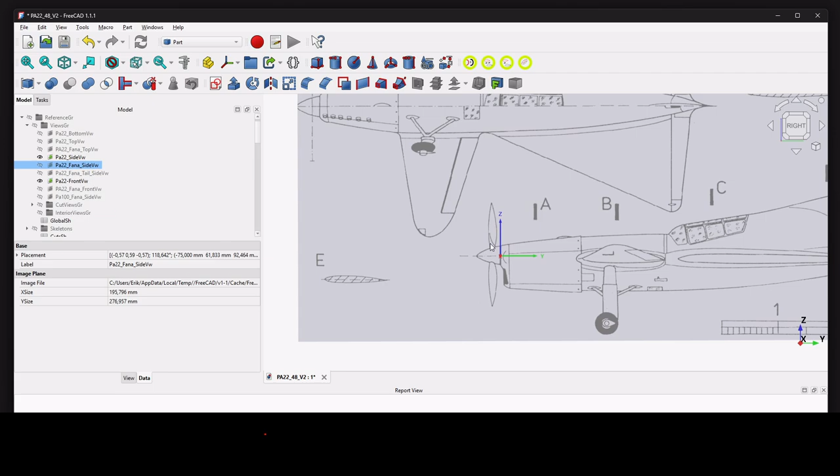So this week we're gonna talk about something a little bit lighter. We are going to focus on the propeller. So the idea is to see if we can follow, I would say, the three views, so the side views and the front views. It turns out that on one of the views, I had both the side view here and also the front view here that you can see here.

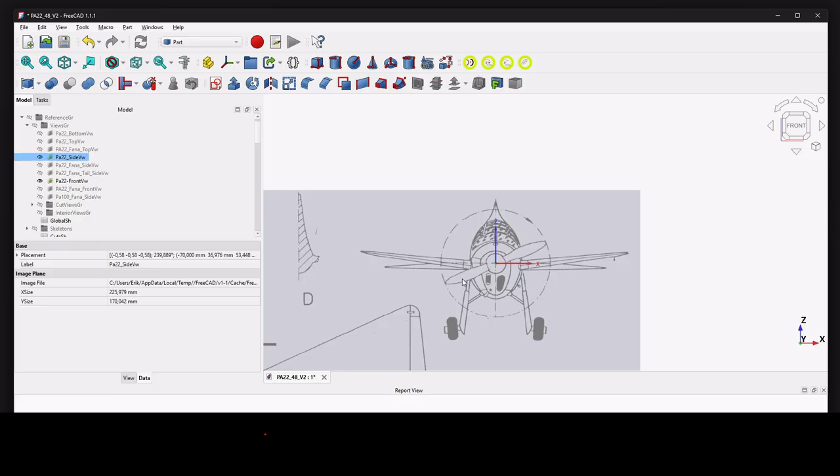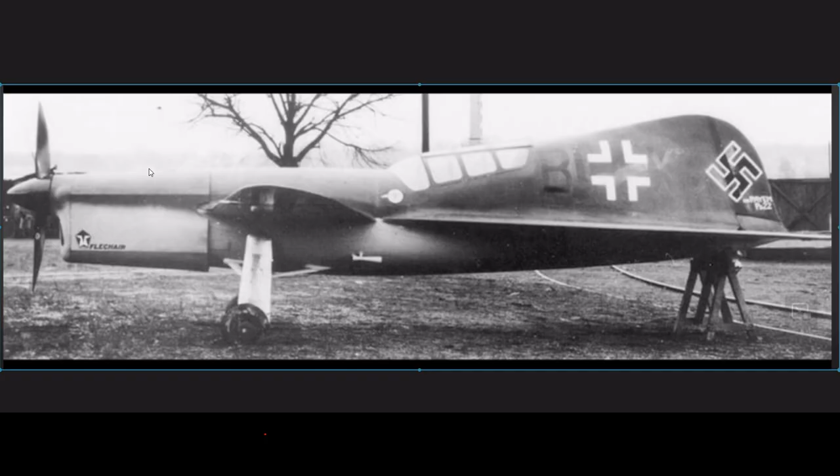So the idea that I will show you is how to mimic that propeller, knowing that I'm not sure it's the good one. The little problem is that the other plan that I had is not exactly the same. As you can see here, the propeller is much thinner in a way on this view than on this other view. But when I'm looking at the actual view here, it's quite impressive. So, well, yeah, I've decided that I would go for this view here.

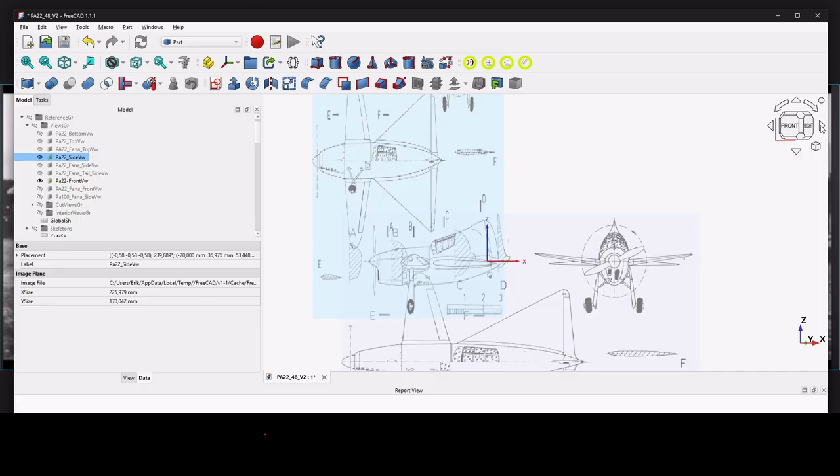Again, the idea is to show you how to mimic a propeller, not to make sure that I have exactly the proper one for the Pa22. So how do I do that in that case? Well, that's easy. As I told you, I'm lucky enough to have those two views here with the propeller. So what I will do is that, as usual, I will do these two things here, these two skeletons, okay?

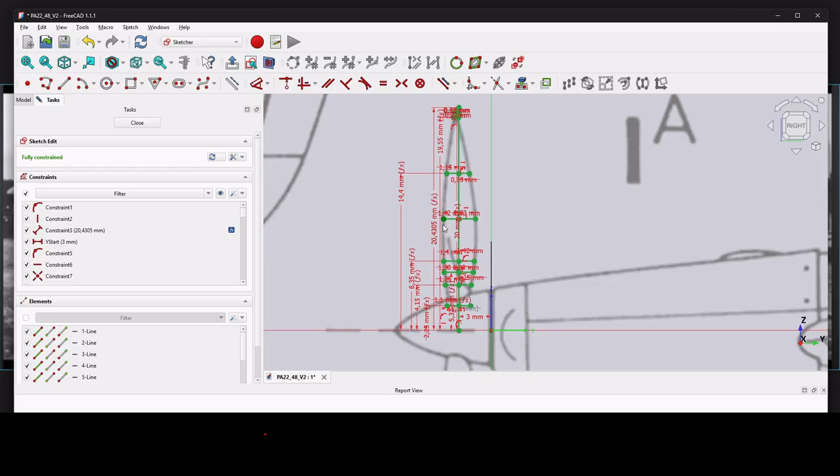As you can see here, so the first one, I have the height with respect to the axis in a way, and then I have all the little width both on this view, on the YZ view and the XZ view that you can see here that I've used there. And how do I do that? Well, once I have that, I'm defining some spline sections.

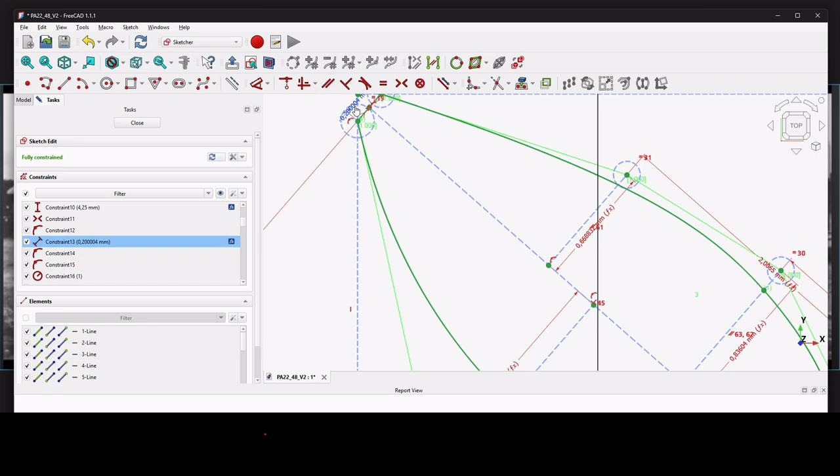So how do I do that? Well, that's a little bit the same thing here. So I'm using the thing that you've seen in order to draw the box. And then normally out of those boxes, I'm trying to be tangent onto the views of those boxes, both on the, I would say, leading edge and at the trailing edge. As usual, the trailing edge is always kind of flat with a minimum thickness that I allow in a way. Okay, so that's always a little bit the same thing.

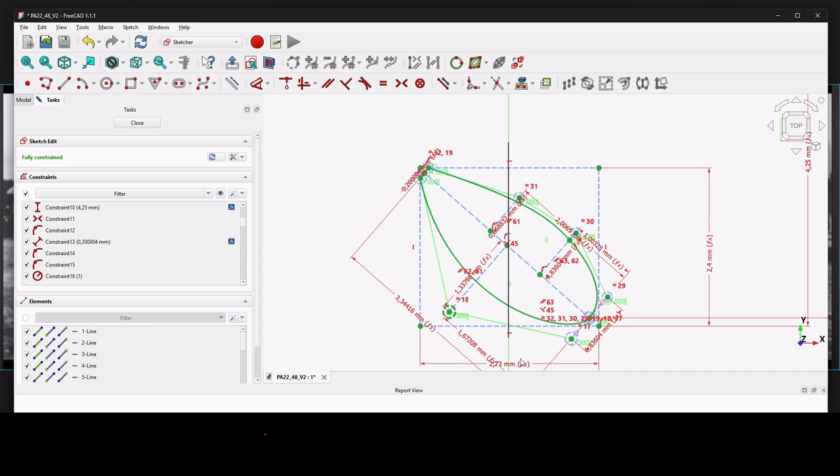And then after that, it's just a spline which is defined by, let's say, 1, 2, 3, 4, 5 points, because you don't need to be. We are not building a flying RC plane. We are just trying to have views corresponding to what we want. Okay. So this one is a little bit, I would say, strange in a way, but I will show you like this section here. It's a little bit closer to what we are used to see when we see a propeller blade in a way.

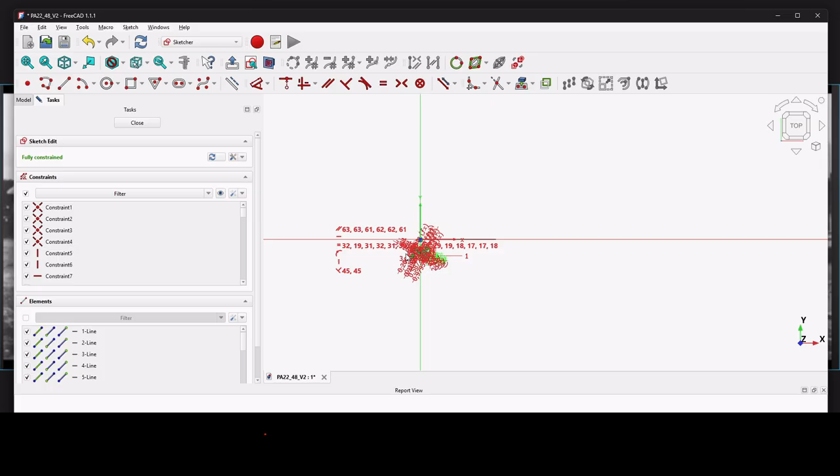So again, to be tangent here, and then those 3 points. Usually I make something like that. And all the idea is to have something which is a little bit thinner here, of course. Usually there is a kind of convex or concave curve here at the end. So that's something that I'm using here, as you can see here. Okay, and then I'm just going. So usually I think I started from the spinner section 2, okay, and then I have gone down and gone up.

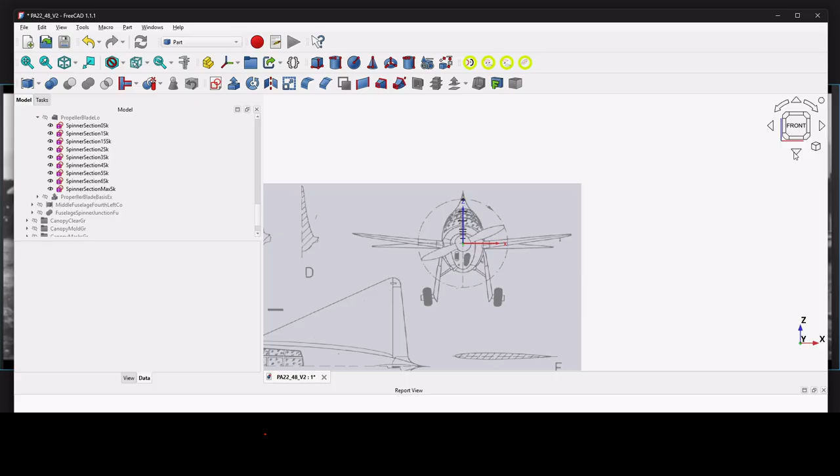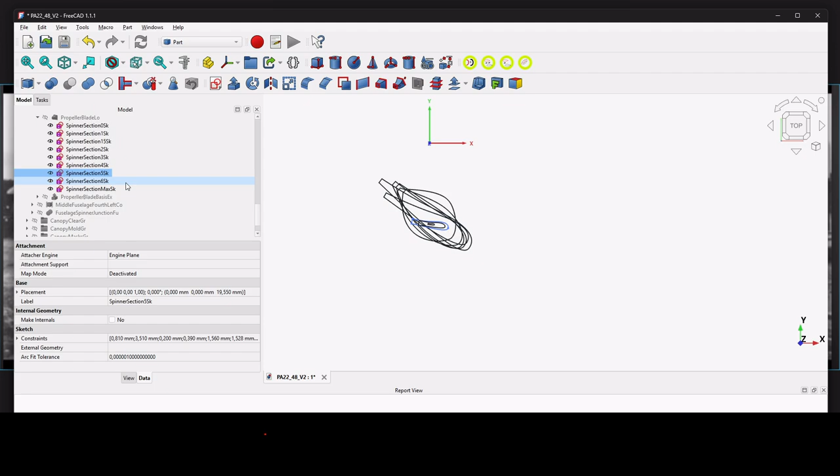So if I do not want to see the skeletons, but I want to see all the views here, and I'm going to look from above, you can see all the evolution of the spinners themselves. Okay, so perhaps I could have been a little bit better, but that's the idea. So that's the 0, the 1, 2, 3, 4, 5, 6, 7. Okay. And then the max, which is always a little bit tricky.

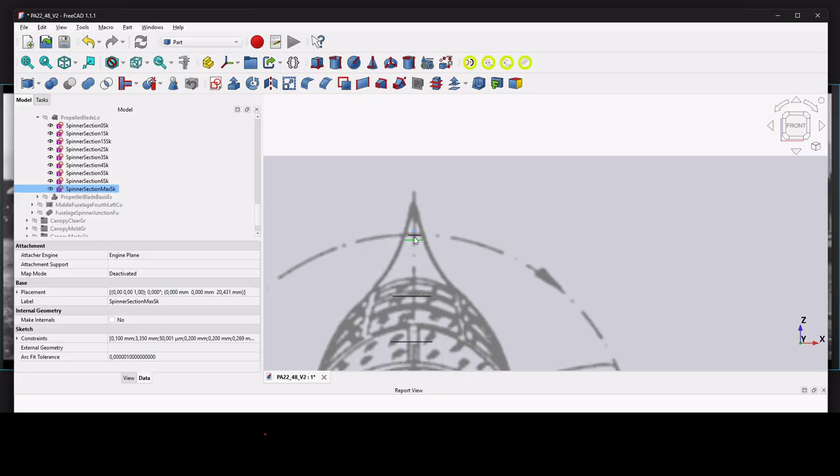So that's the one that I've kind of done in such a way that, again, I'm not too far when I'm looking at the max here. Yeah, well, that was in that direction in any case, and then also on that direction here. So again, the side view and the front view were not exactly agreeing on the global dimension of the propeller, but okay, that's what I've done.

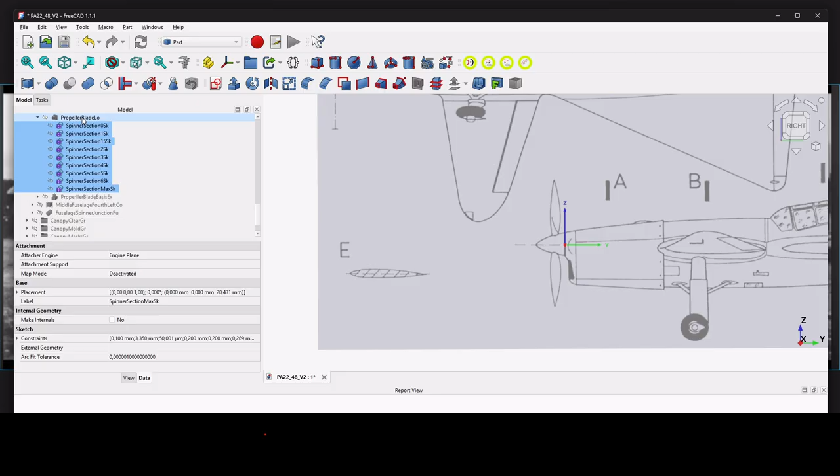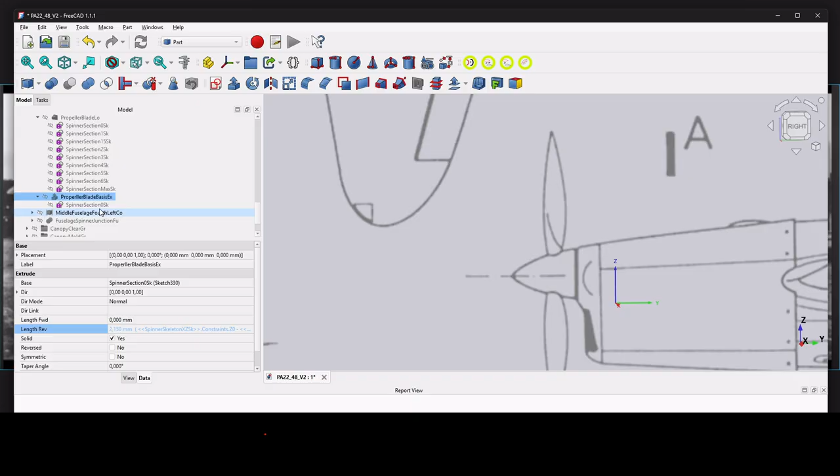And then that allows me to build the loft, okay? And what's funny is that the loft kind of replicates a little bit this kind of curve here. So I think that's pretty good. Okay. And also what I've done is that I've extended that using the same thing with a, okay, so when I'm looking from the right, I've extended that to go to 0.1 millimeter to have the tolerance that is going down here.

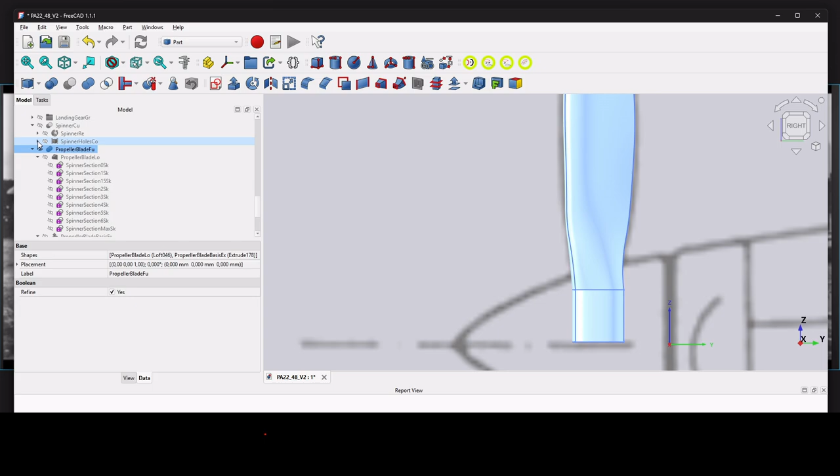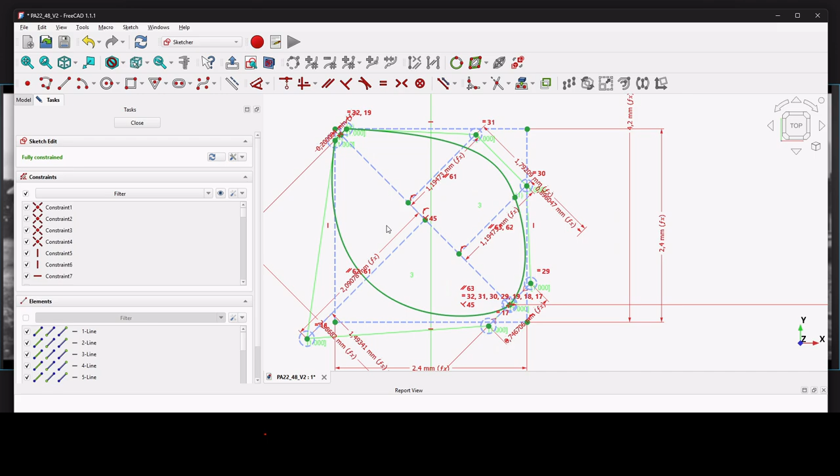And in fact, what I've done is that I've taken that section 0 in order to have a hole. Okay, so I've retaken that section 0 and I've extended everything with a 0.1 millimeter. That was allowing me, no, so here, sorry, that's this one. Okay, I have extended all this with 1 millimeter here. So that's always the same kind of thing.

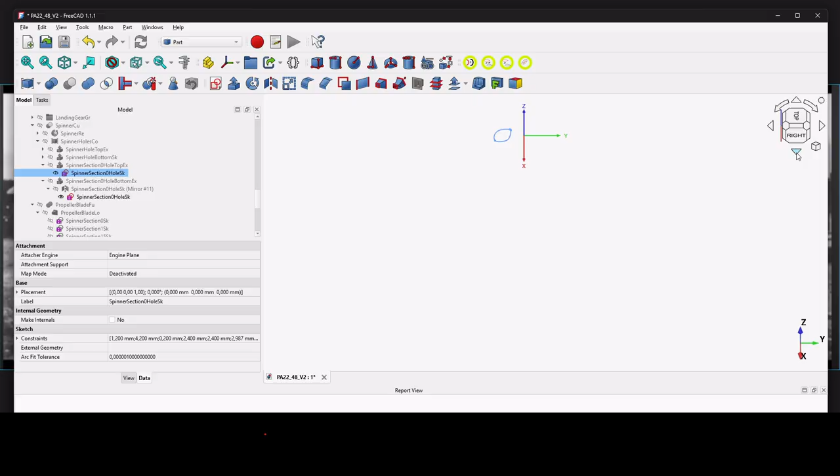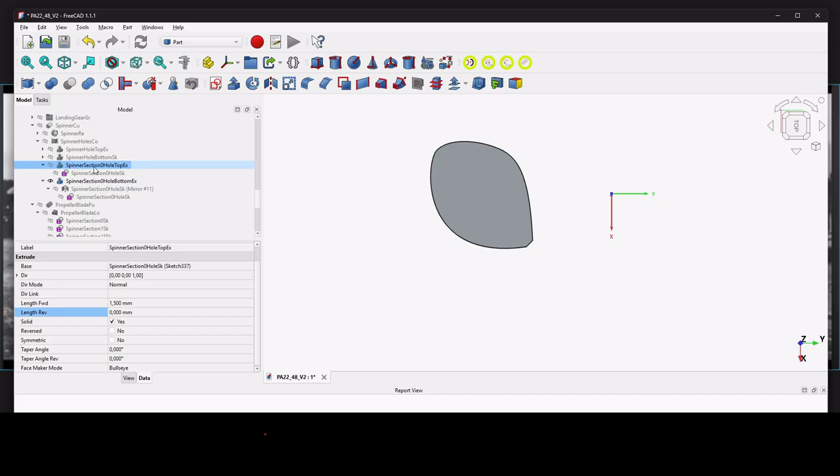And I can show you here. With respect to the section 0, you will see that the section 0 is exactly at tolerance inside the thing. And that's exactly what I've done, which allows me to create both the hole bottom and the hole top, okay, which will allow me to completely, I would say, direct what's happening inside the spinner, in fact.

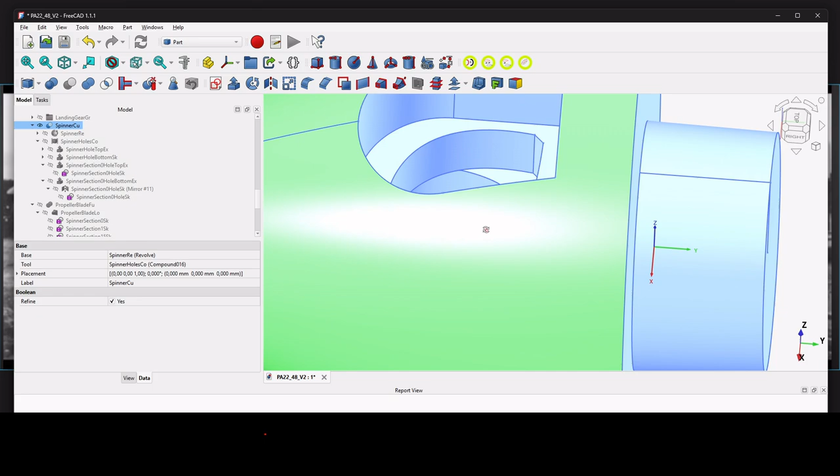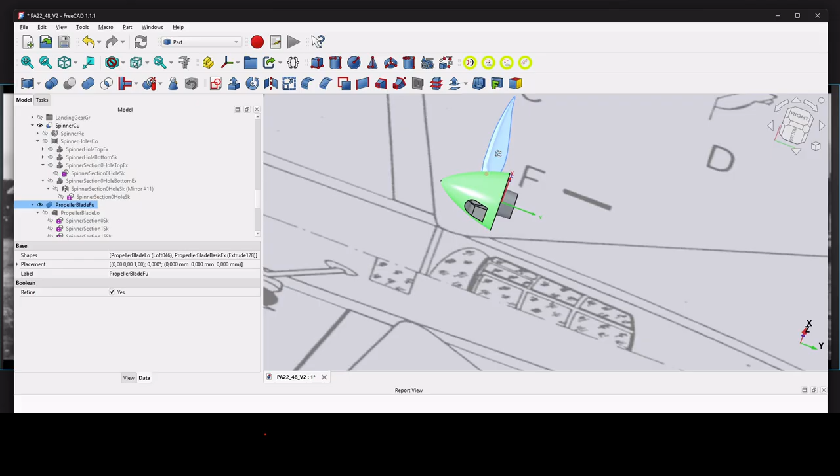And in fact, once I've done the cut, I will have a good way of positioning the blades on top and on the bottom. And they will be blocked at the end by the other curve. So that will allow me, in a way, to have something that will help me position the blades very well. So that's how I've done the propeller blades on the spinner. And yes, it was kind of easy.

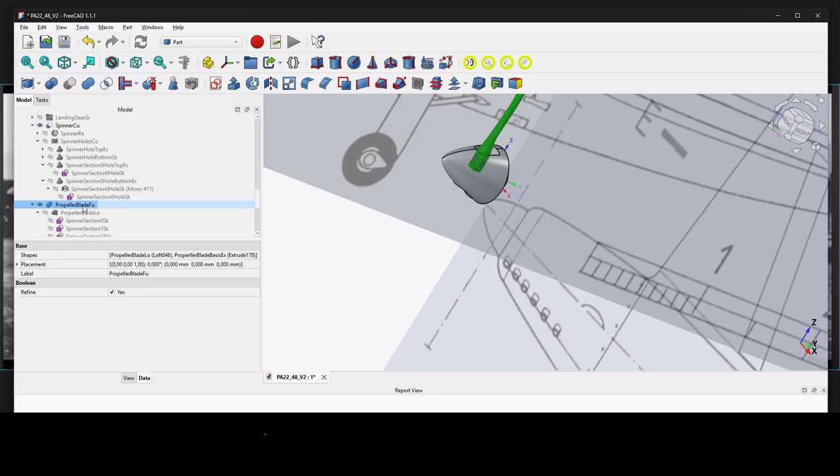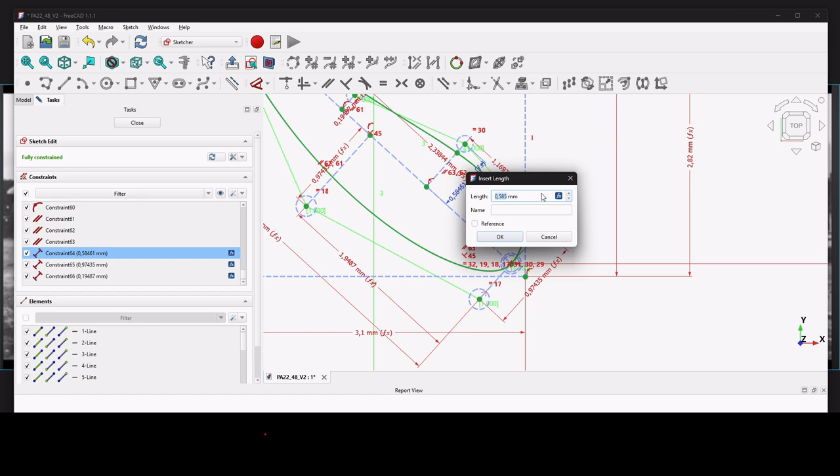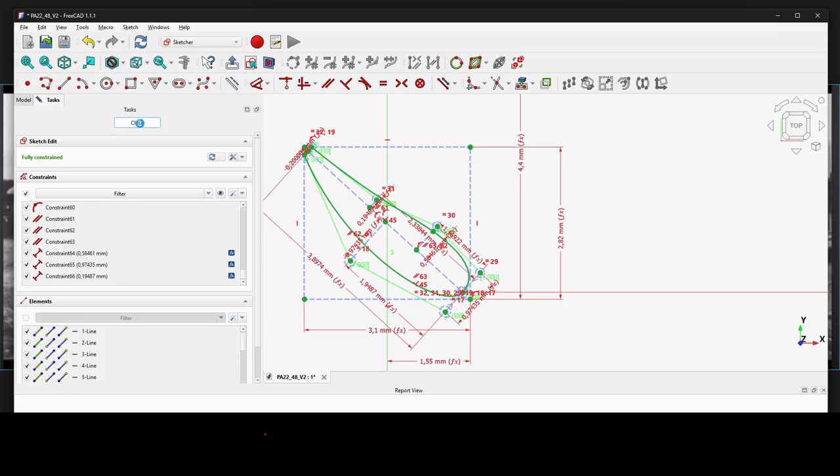A little comment is that, yeah, you've seen that. In fact, when I was defining my sections, as usual, I've always been doing things with respect to a given dimension, okay? And here everything is with respect to the length, okay? And that allows me to copy paste going from one side to the other and just doing some small evolutions when I'm going from one cut of the propeller blade to another cut of the propeller blade. But now, yeah, these techniques, because that's the one that I'm using for everything in a way.

Yeah, so that's going to be a very, very short session. But yes, the next one will be really on the building of the final model. So it's going to be perhaps a long one, together with a change of designs that I had to do when doing my first build.